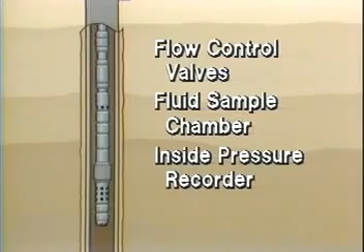In their simplest form, the drill stem test tools run on either drill pipe or tubing, consist of flow control valves, a fluid sample chamber, an inside pressure recorder, one or more packers to isolate the zone being tested, a perforated anchor for fluid to enter the tool string, a temperature recorder, and a pressure recorder.

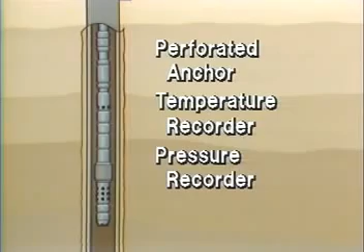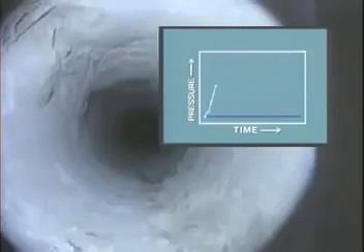As the tools are run into the hole, the increasing hydrostatic pressure of the mud column is recorded by the pressure gauge. The tools are run into the hole with an empty drill pipe or tubing, except in those cases where a carefully designed water, diesel, or nitrogen cushion is required.

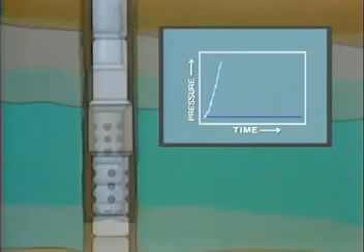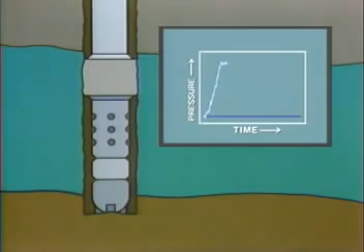When the tools reach the depth of the formation to be tested, the packer is set against the walls of the hole or casing, thereby isolating the pressure of the mud column from the pressure in the test zone. Pressure is measured at the very bottom of the tool string and also within the tool string itself, and so the gauge will now record the pressure imposed by the hydrostatic head and any squeeze pressure developed when setting the packer. A flow valve is then opened.

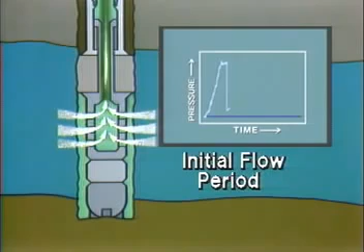The formation fluids are free to flow into the low-pressure drill pipe. As fluids fill the drill pipe, the pressure increases. This is the initial flow, or pre-flow period, and is usually of short duration, typically 5 to 10 minutes. Its purpose is to relieve any buildup in pressure that may have occurred in setting the packer or packers, or any supercharging of the reservoir due to mud filtrate invasion.

A control valve is then closed. And because fluids can no longer flow into the drill pipe, the pressure recorders begin to feel the formation pressure, and the recorded pressure normally approaches the original formation pressure. This is the initial shut-in pressure. This shut-in period typically lasts for 30 to 60 minutes.

The control valve is then opened once again for the second, more important flow period. The test will last for 60 to 180 minutes for an open hole test and up to 8 to 10 hours for a cased hole test.

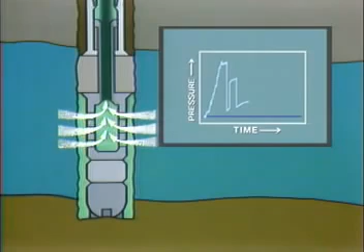At the end of this second and final flow period, a fluid sample is collected and isolated in the sample chamber. Samples are also collected at the surface for wells that flow to the surface. This final flow period is followed by a final shut-in period, which should last for about twice as long as the final flow period. This gives a value for the final shut-in pressure.

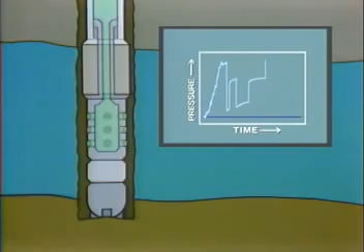Any produced hydrocarbons are then reverse circulated out of the test string. The packer is carefully released and the tool pulled to the surface. Note that the hydrostatic pressure imposed by the mud column at the bottom of the drill stem, as soon as the packer is released, is reduced as the tool string is pulled out of the hole.

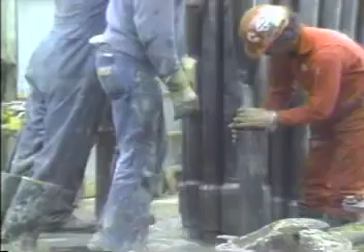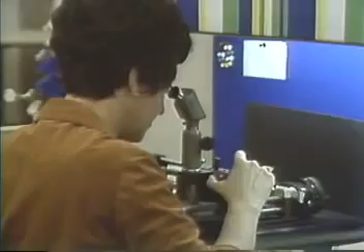At the surface, the pressure recording device is retrieved from the tool string, and the dynamic response of the test interval to the alternating pressure drawdown and buildup periods is analyzed. Of course, if the required information was not obtained, the test must be repeated.

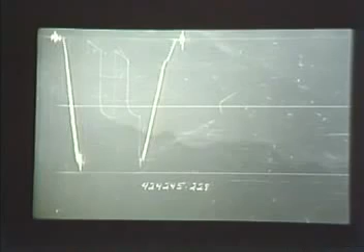To avoid this costly remedy, it is now possible to measure pressures at the surface while the test is being run. This provides immediate information on the quality of the test, an opportunity to analyze the data before the tool is retrieved, and the ability to terminate the test when sufficient data has been collected.